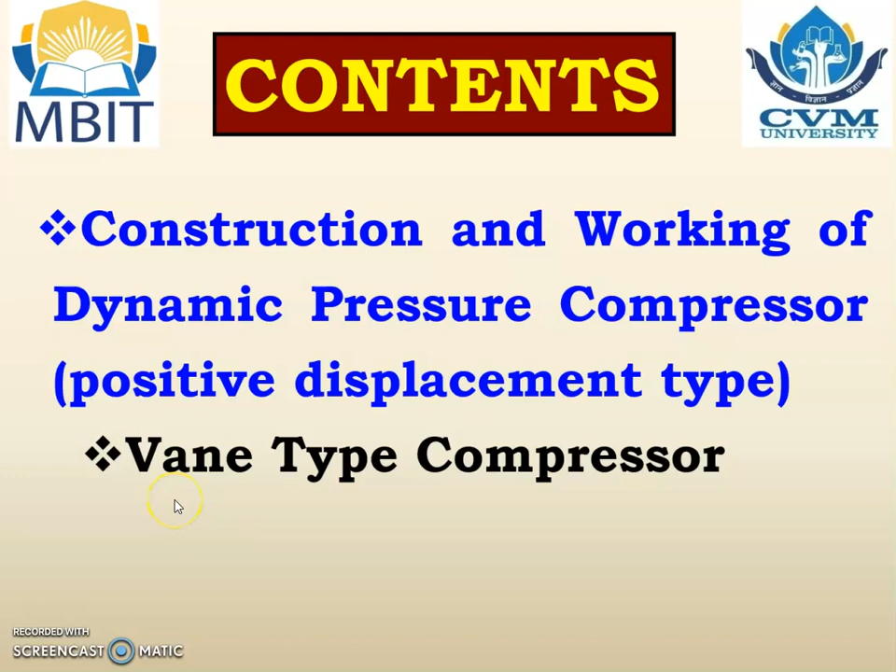In today's lecture, we are going to study about the construction and working of dynamic pressure compressor, and particularly positive displacement type dynamic pressure compressor. We are going to study today about the Vane type compressor. So this is the animation for the Vane type compressor. The construction and working of the Vane type compressor is similar to the Vane type pump.

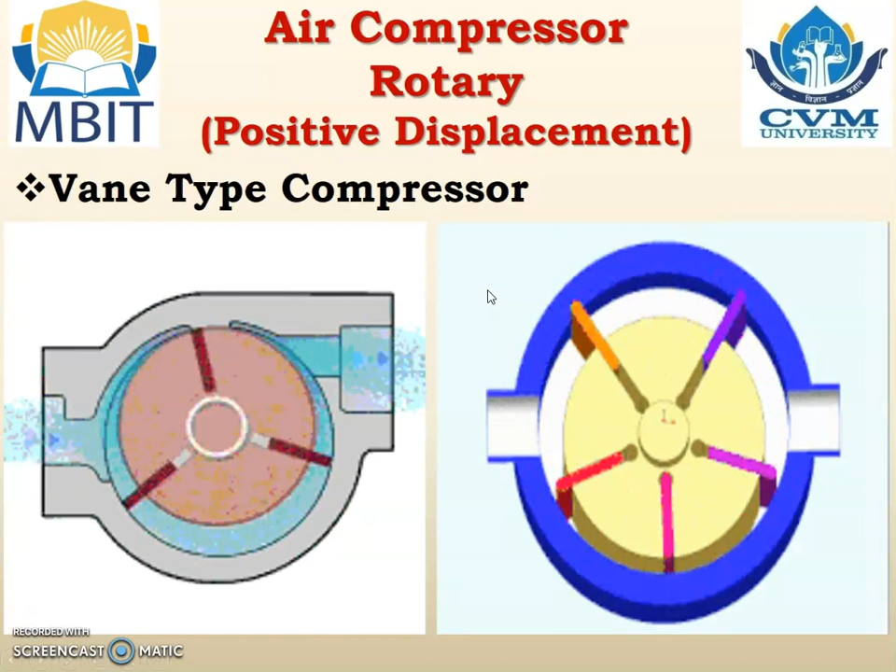Construction. The construction is similar to the Vane type pump. It contains a rotor mounted on a shaft of electric motor. So it has a rotor which you can see here with the light yellow color, and it is mounted on a shaft, and the shaft is connected to electric motor. On the periphery of rotor, grooves are there. Here in the animation you can see 5 grooves.

Sliding vanes are arranged in each groove with the spring. So here you can see the sliding vanes are inserted in a groove, and at that end the springs are located. Thus when we press the sliding vane, it moves inside the groove and comes out when we release the pressure on it. The rotor is placed in the casing eccentrically.

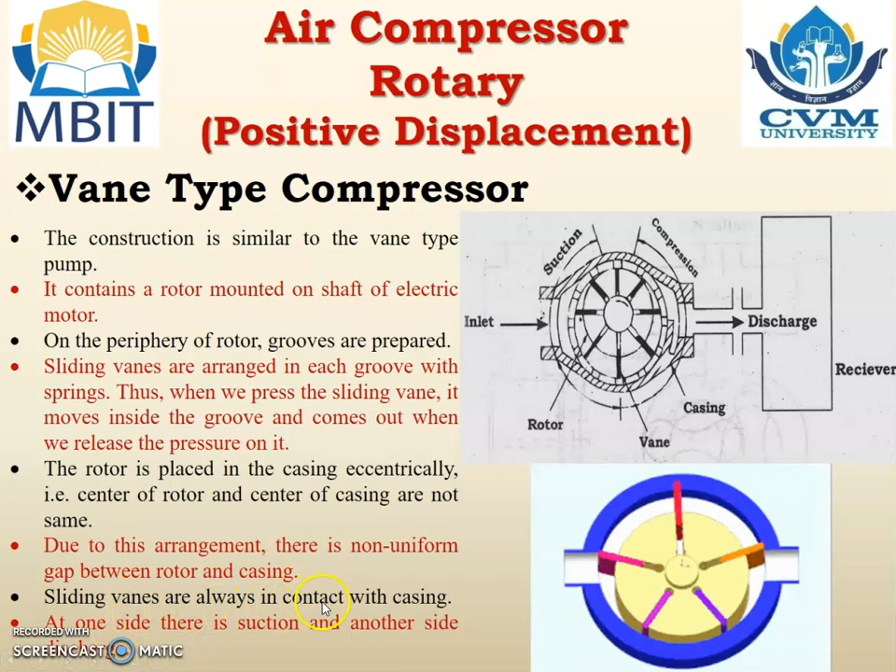It means the center of both the blue outer casing and the rotor are not same, and due to that there is a non-uniform gap between the rotor and casing. When the rotor rotates and there is a gap between the rotor and casing, the vane will come out, and when there is no gap, the vane will insert into the groove. Sliding vane is always in contact with the casing. At one side there is suction and another side there is discharge.

Working. As the electric motor rotates, rotor also rotates, and air enters the compressor or the blower. Air is entrapped between 2 vanes and a casing. Thus the entrapped air has to rotate and move along with the rotor from suction to discharge section. When air moves from suction to discharge section, gap between the rotor and casing decreases, and thus the air is compressed. Compressed air comes out from the discharge section.

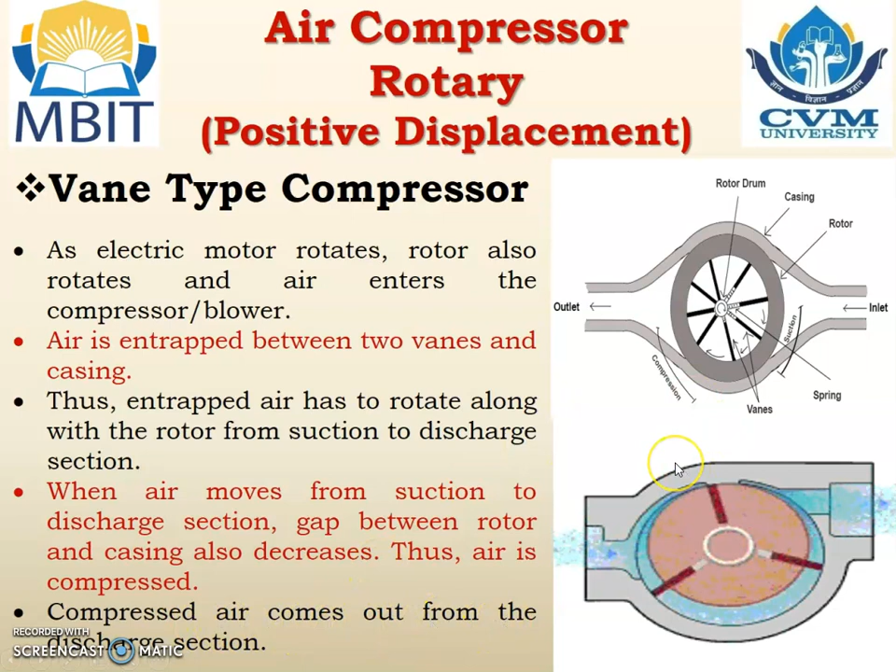Let us see exactly how it works. You can see here air enters at the suction. The horizontal line indicates the air has entered. In this particular vane compressor there are 4 vanes, and it moves in an anti-clockwise direction. When the rotor moves anti-clockwise, the air which entered previously is now entrapped between 2 vanes, casing and rotor, as indicated by the horizontal line.

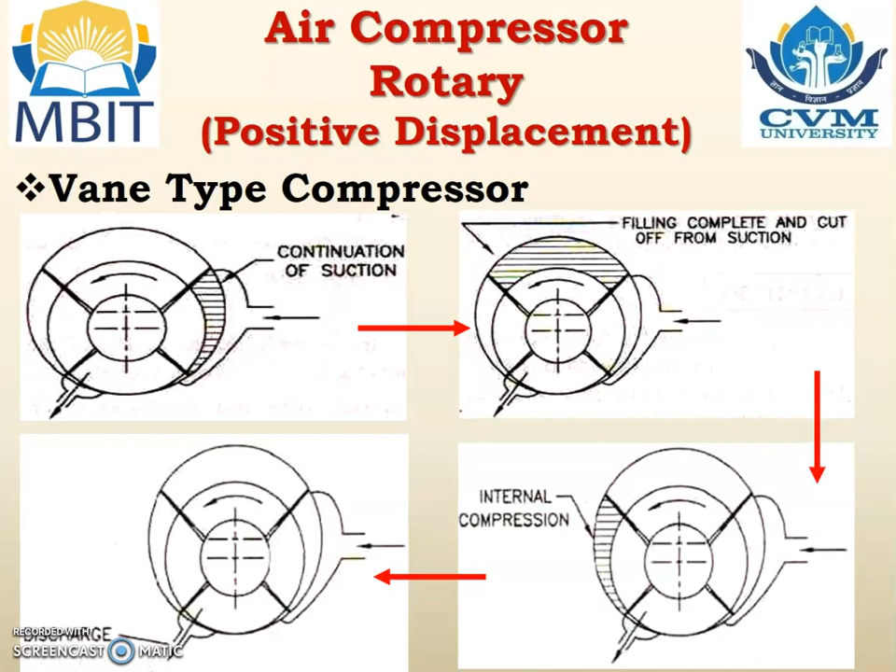As the rotor again rotates in anti-clockwise direction, you can see the air comes here. Here the gap is less, and as the gap is less, the air is compressed. When the rotor rotates again, the compressed air is taken out from the discharge place. So this is how the Vane type compressor works.

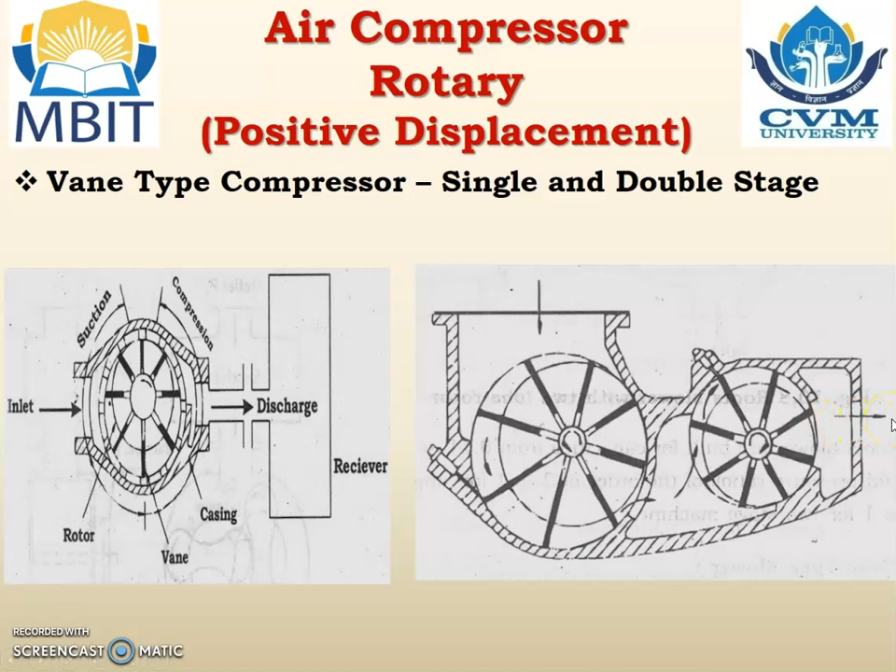This is the single stage vane compressor, and this is the double stage vane compressor, in which the air is compressed in one vane compressor, then it enters into another vane compressor where it is again compressed, and then it is taken to the storage. So it is known as single stage and double stage Vane compressor.

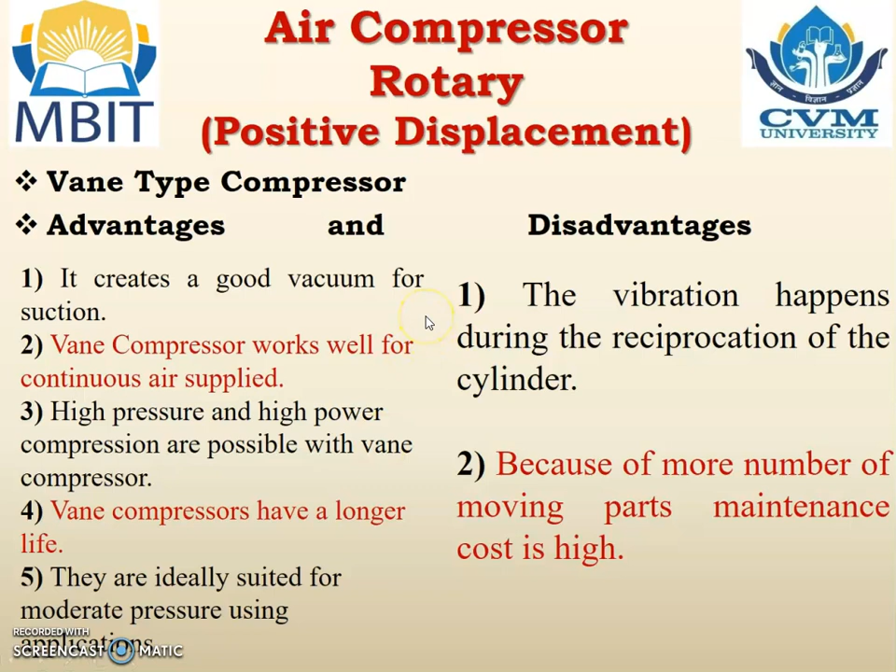Applications: they are used in agriculture for operating farm equipment and material conveying; in auto body paint shops for paint pump operation; in tire and wheel shops for tire inflation; in dry cleaning; in operation of air knives for cutting and peeling; and in welding operations and air operated metal and woodworking tools.

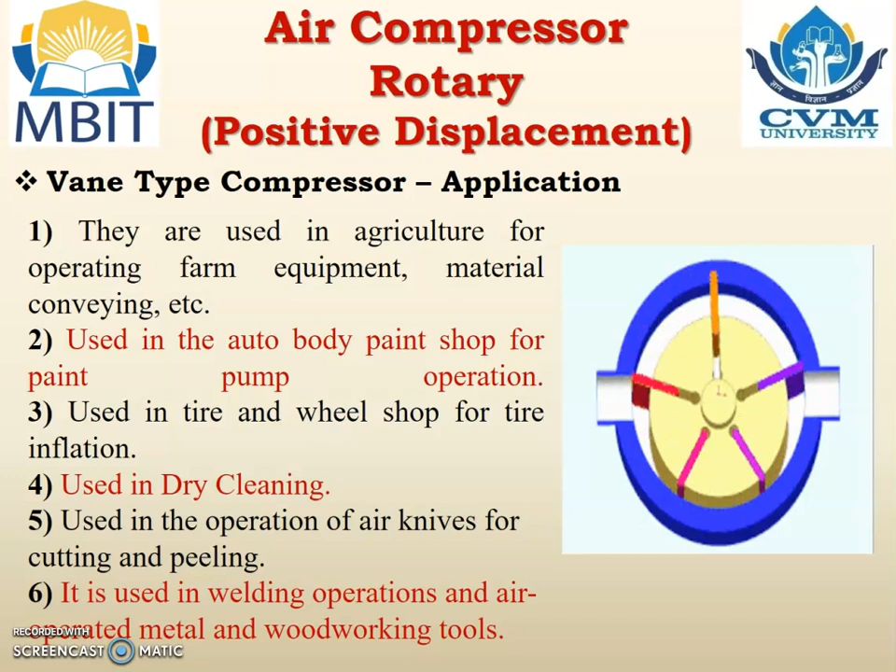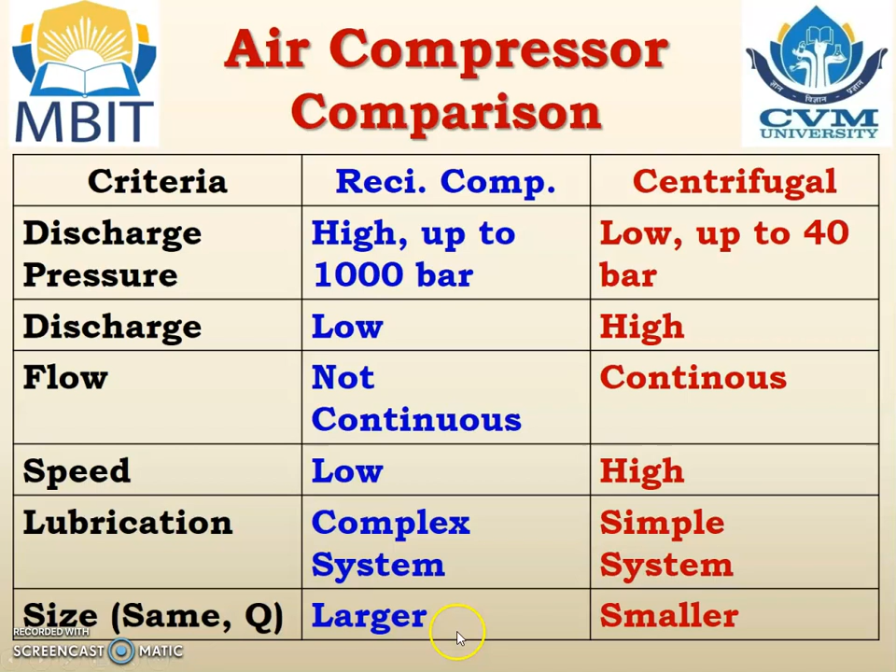Lubrication: as the reciprocating compressor contains more moving parts, the lubrication system is complex, while in centrifugal it is simple. Size: for the same quantity of air discharged, the reciprocating compressor is larger, while the centrifugal compressor is smaller. Maintenance cost is more for reciprocating compressor and less for centrifugal. Volumetric efficiency is less in reciprocating compressor, while high in centrifugal compressor.